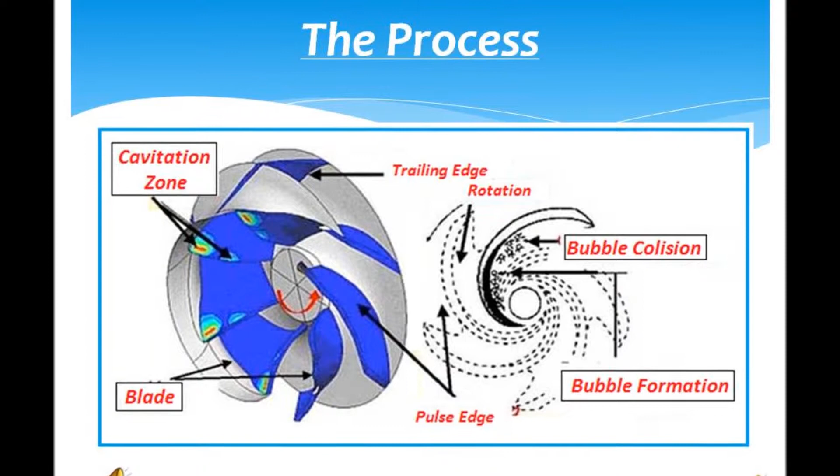Cavitation is a vacuum aspiration and undesirable hydrodynamic effect which occurs when water or other liquid fluid passes at high speed along a sharp edge, producing a decompression of the fluid.

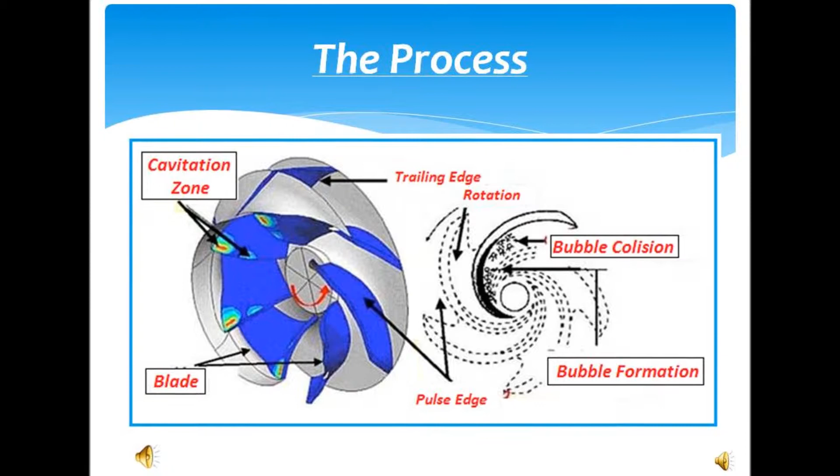Specifically, in a pump it occurs when the fluid has difficulty entering the suction zone, so that the pressure drops in this duct. If the pressure is less than the vapor pressure of the fluid itself, it will lead to the formation of bubbles which are called cavities.

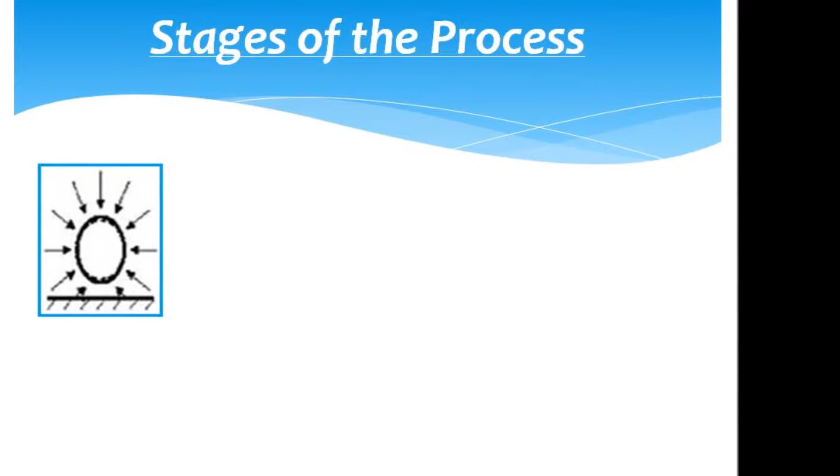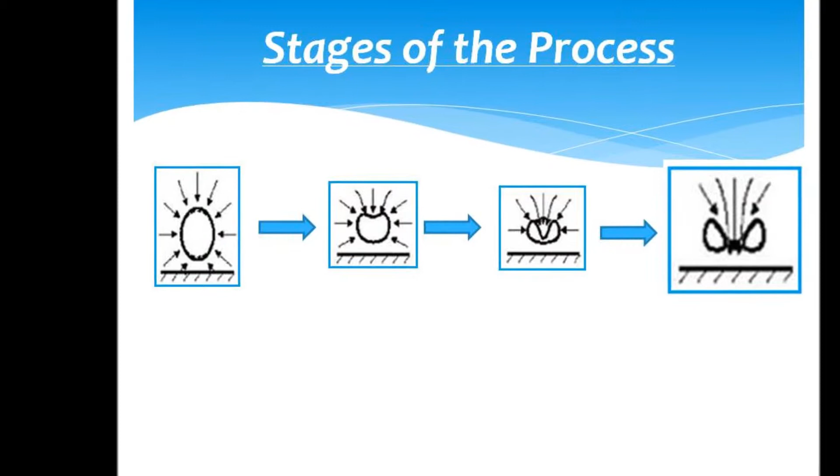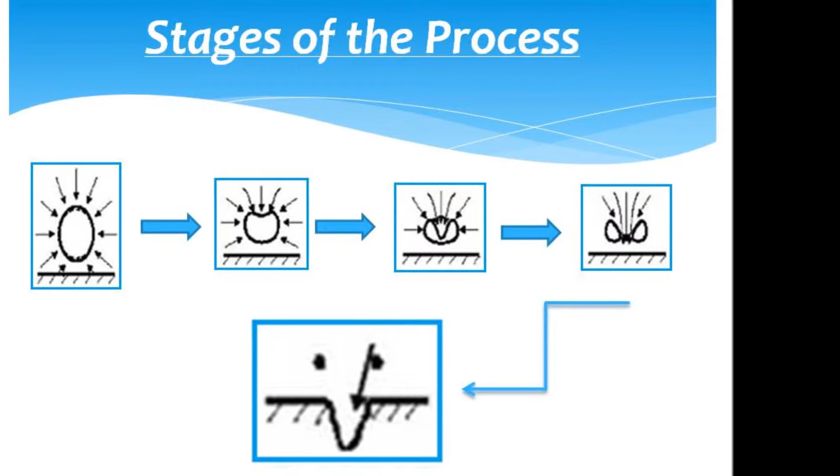The NPSH, net positive suction head, is a measure of the energy available at the pump suction above the energy that would result in the onset of cavitation. Being an incompressible fluid, we can refer this term to the suction head available.

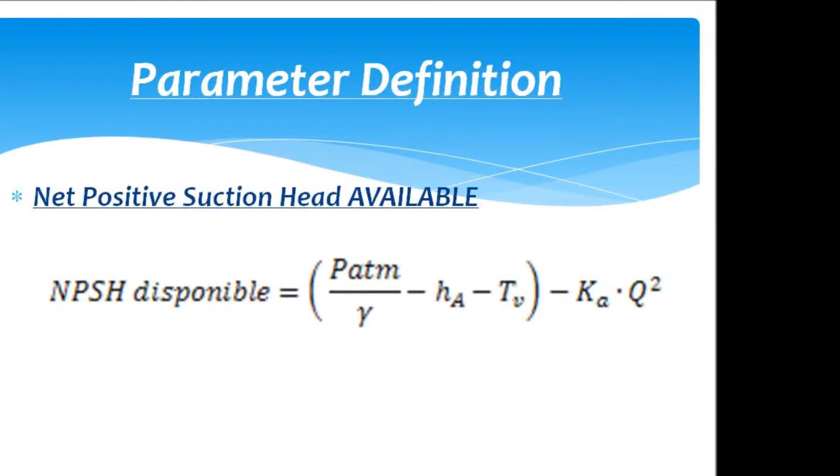For this there are two terms: the NPSH available and the required NPSH. The equation of the NPSH available consists of two terms.

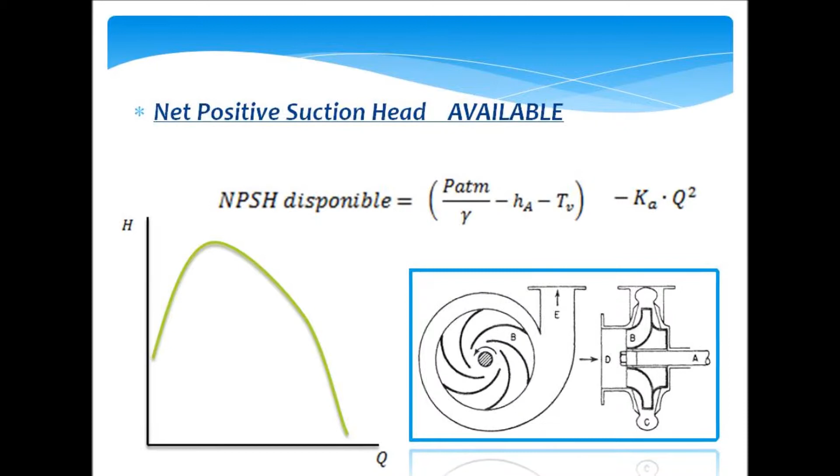The former does not depend on the pump, but only depends on the installation, specifically the height at which you place the pump and suction conditions. The second refers to the losses due to friction in the suction.

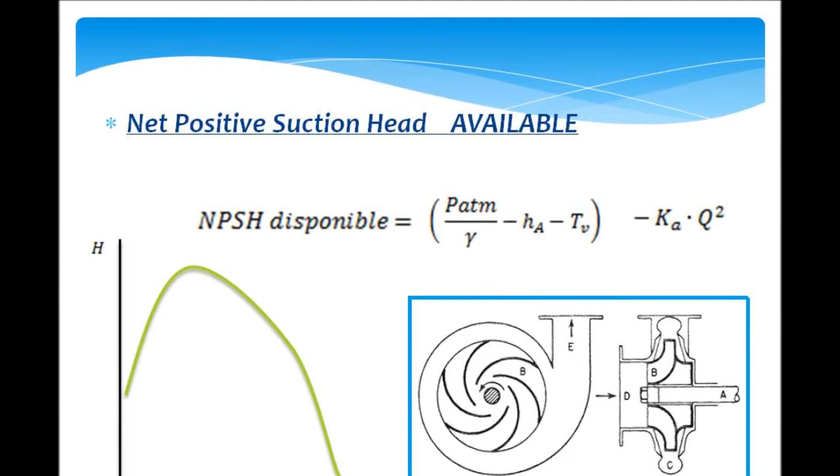It is represented graphically. The equation of the required NPSH also consists of two terms. The former refers to the kinetic energy at the pump inlet. The second to the hydraulic losses by friction and shocks from the point of entry to the impeller.

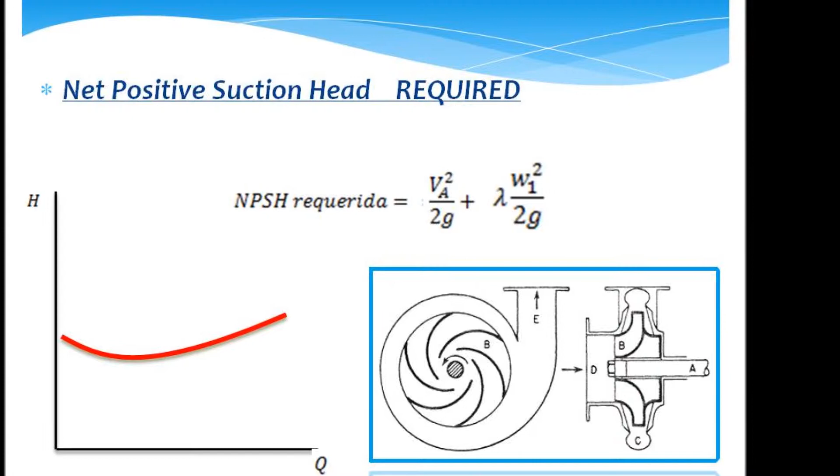The minimum pressure point is well represented, for which cavitation occurs when it is not fulfilled that the pressure in the suction side of the pump is greater than the vapor pressure of the fluid, so that the difference of the two terms should be...

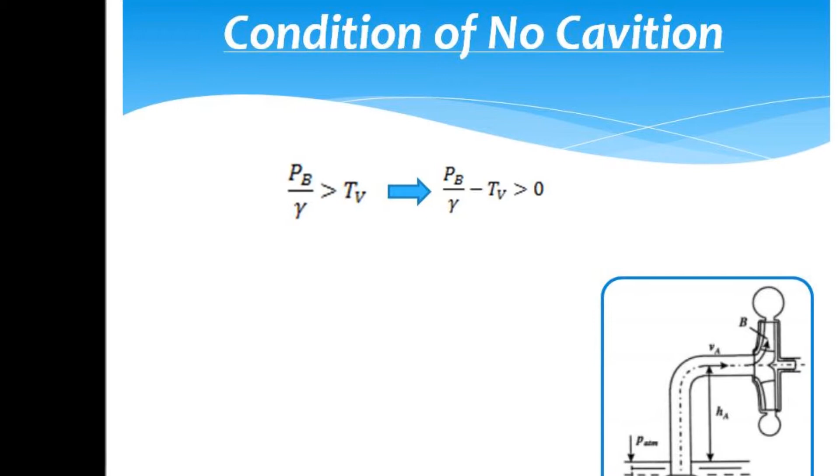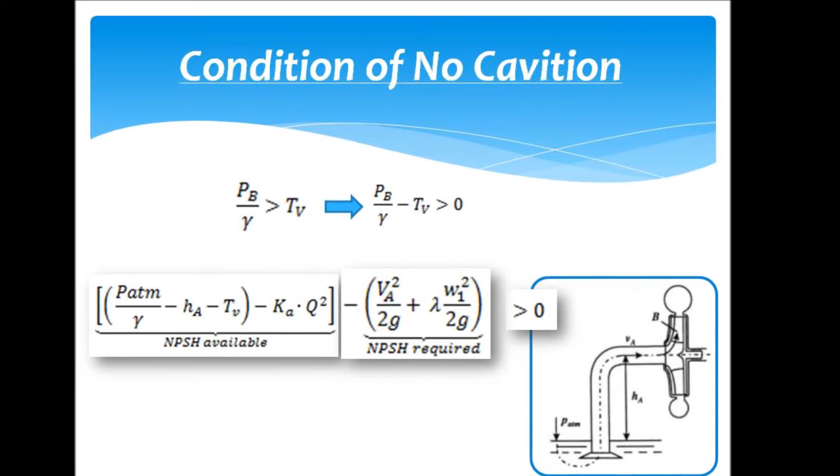Substituting, we obtain that cavitation does not occur when the difference between the available and required NPSH is positive.

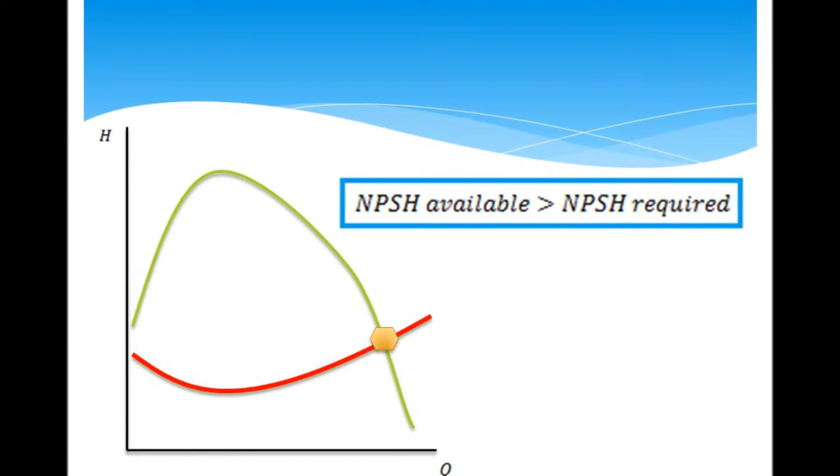Plotting the two curves, we see that the cavitation limit is at the intersection of the two curves. Thereafter is the phenomenon.

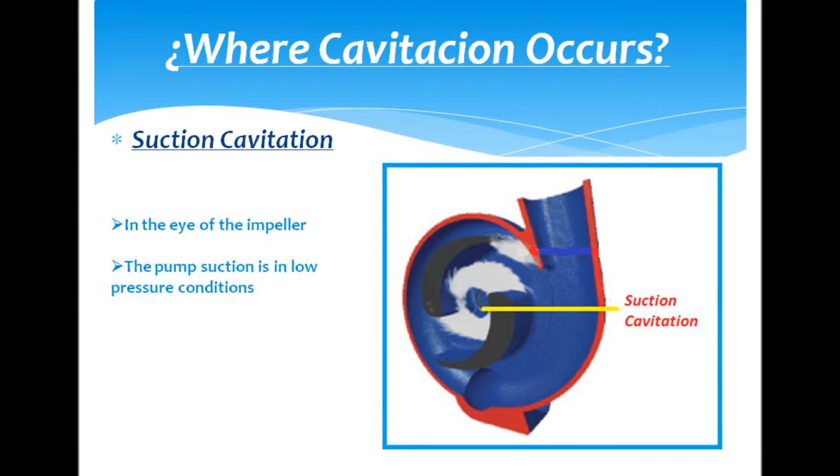Pump cavitation has two zones. Suction cavitation occurs in the eye of the impeller, and occurs when the pump is in a condition of low pressure. High vacuum causes the liquid to be transformed into steam at the impeller inlet.

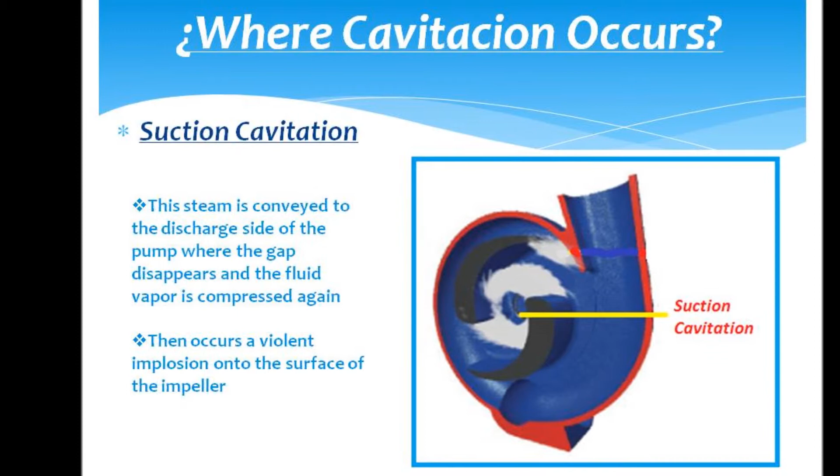This steam is conveyed to the discharge side of the pump, where the gap disappears and the fluid vapor is compressed again due to discharge pressure. Then a violent implosion occurs onto the surface of the impeller.

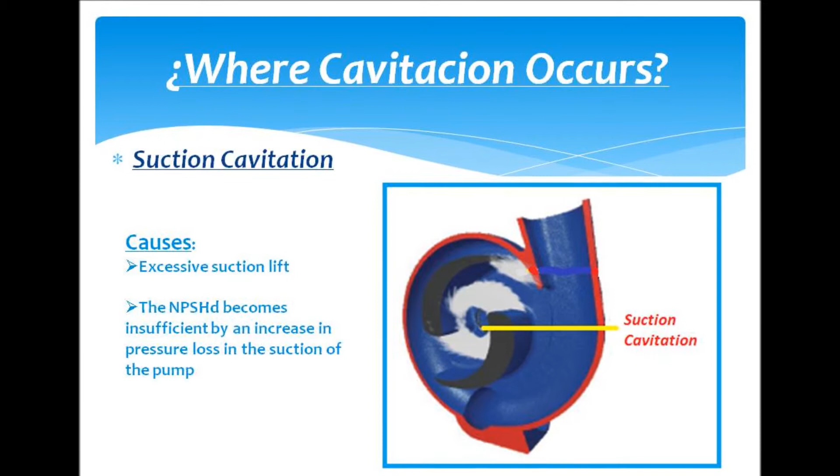This type of cavitation is caused by excessive suction, such that the NPSH becomes insufficient due to an increase in pressure loss. Impulsion cavitation occurs between the impeller blade tip and the casing, where the body ends.

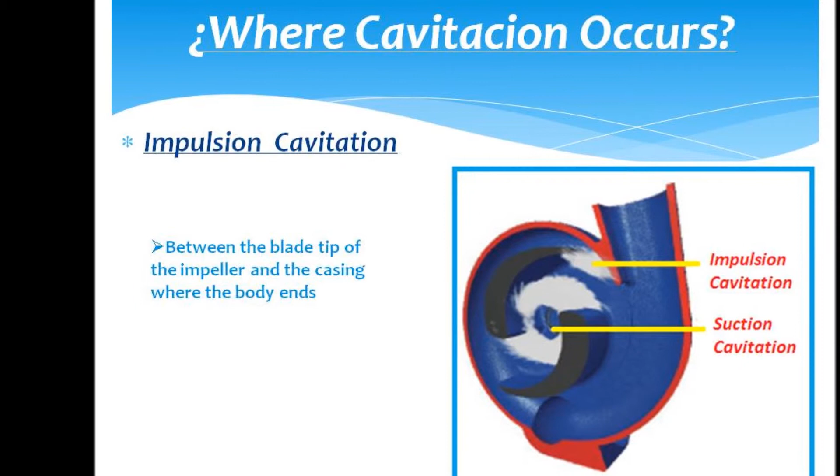The high-pressure discharge causes most of the fluid to flow inside the pump rather than out the discharge zone. This phenomenon is known as slippage, as the liquid flows around the impeller and must pass at very high speed through a small opening between the impeller and the pump casing.

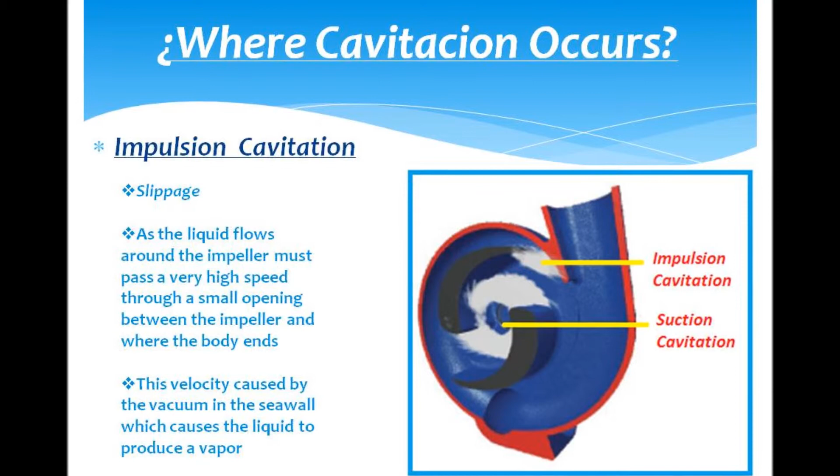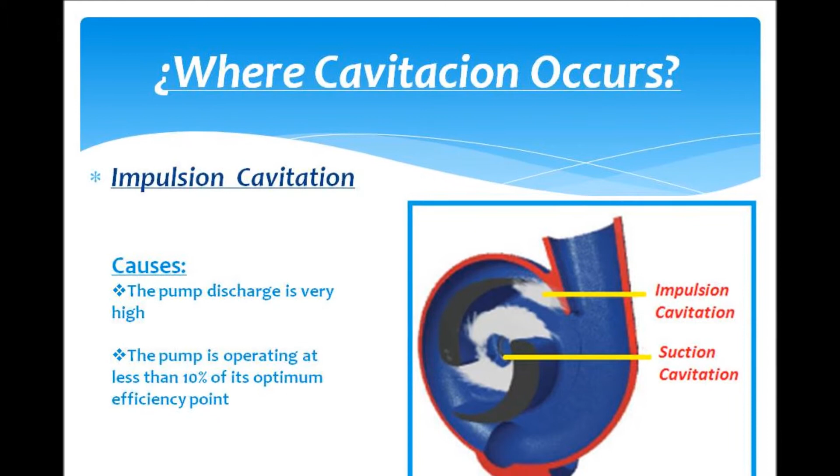This velocity, caused by the vacuum in the seal wall, causes the liquid to produce vapor, which occurs when the pump discharge is very high. This typically occurs in a pump which is operating at less than 10% of its optimum.

Several cavitation problems can occur. The collapse of the cavities releases large amounts of energy which can cause extensive damage.

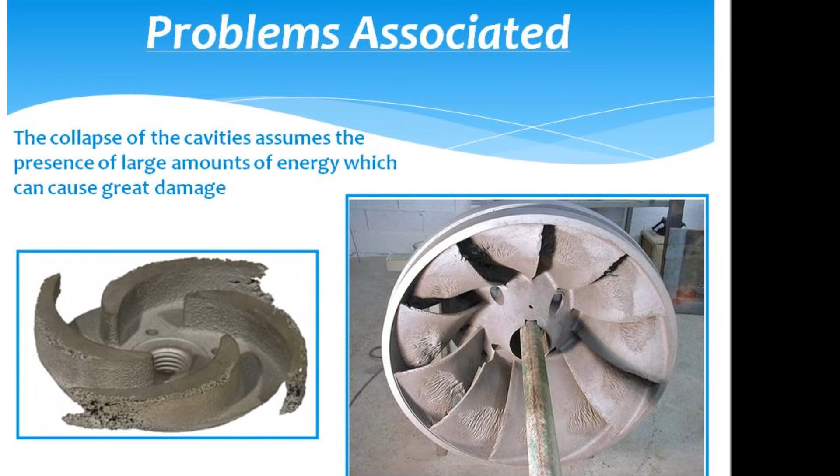Cavitation can damage almost any material. The pitting caused by the collapse of cavities produces huge wear on the different components and can dramatically shorten the life of the pumps or propellers.

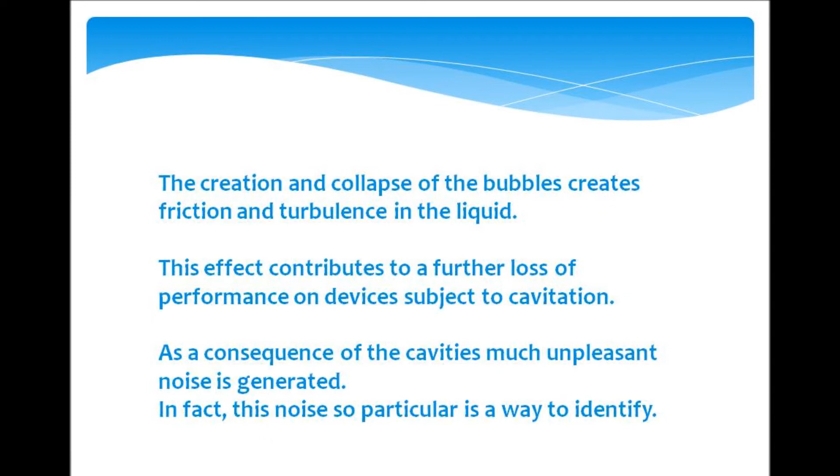Creation and collapse of the bubbles creates friction and turbulence in the liquid. This contributes to a further loss of performance on devices subject to cavitation.

As a consequence of the cavities, a disagreeable noise is generated.

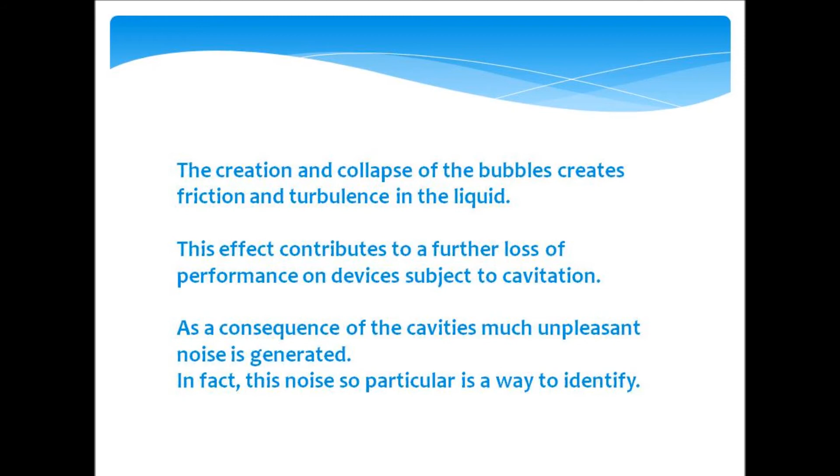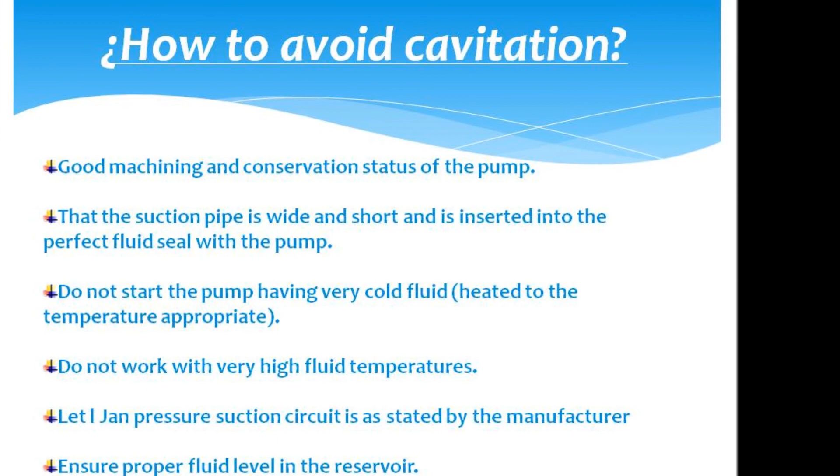In fact, this particular noise is a way to detect it. To prevent cavitation: ensure good machining and conservation status of the pump, that the suction pipe is wide and short and is properly sealed with the pump. Do not start the pump with very cold fluid; heat it to the appropriate temperature. Do not work with very high fluid temperatures. Ensure that the pressure in the suction is as stated by the manufacturer, and ensure proper fluid level in the reservoir.